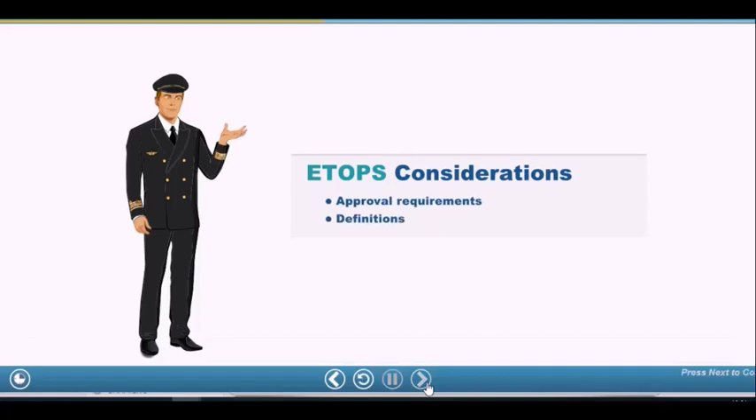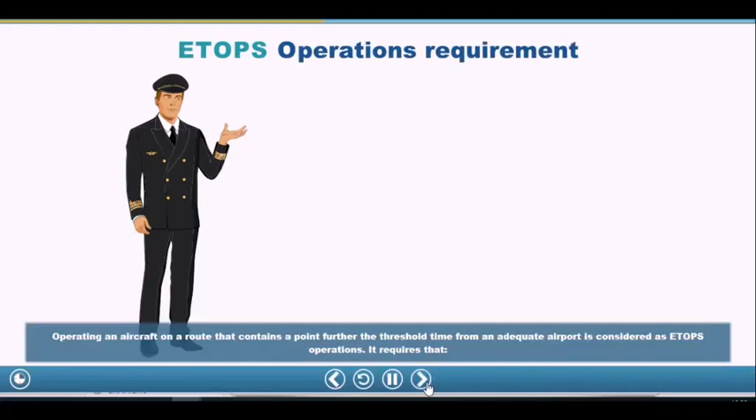Operating an aircraft on a route that contains a point further than the threshold time from an adequate airport is considered ETOPS operations. It requires that the aircraft is designed and certified for the intended ETOPS operations, that a training program has been established for flight crew and any personnel involved, including dispatchers and maintenance staff, that the operator has established operating procedures, and that the operator demonstrates its ability to support such operations with respect to its organization and experience, to be approved.

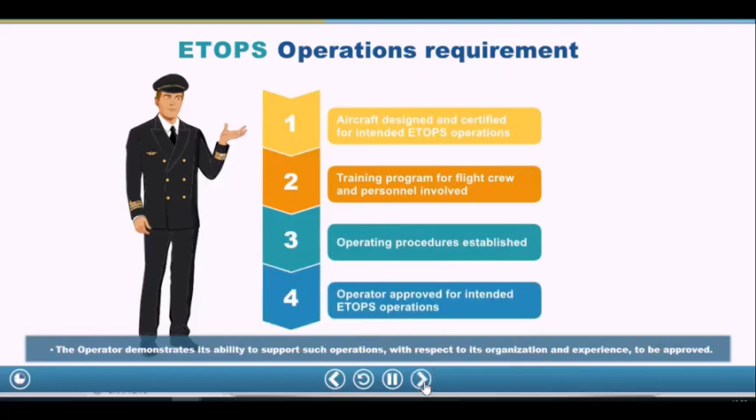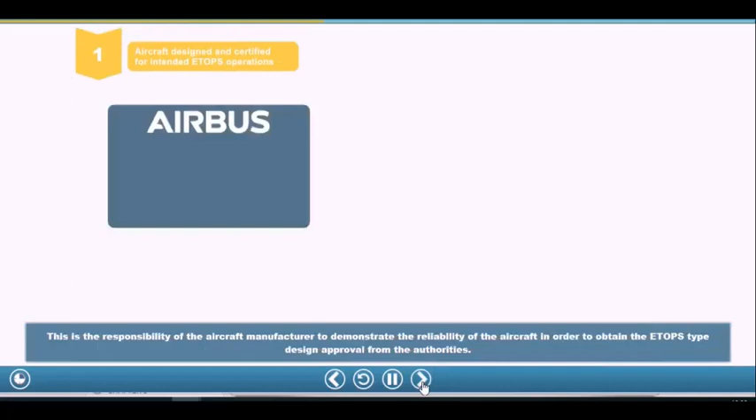As mentioned previously, the aircraft must have been designed and approved to meet the ETOPS requirements. This is the responsibility of the aircraft manufacturer, to demonstrate the reliability of the aircraft in order to obtain the ETOPS type design approval from the authorities.

The certification focuses on an airframe systems engine combination. Any deviation from the aircraft baseline to enable an ETOPS certification must be contained in the Configuration, Maintenance and Procedure Standards (CMP) document. The CMP is validated by the authorities. The process to be ETOPS certified is long, but the experience already gained on similar systems or engines helps to reduce this process.

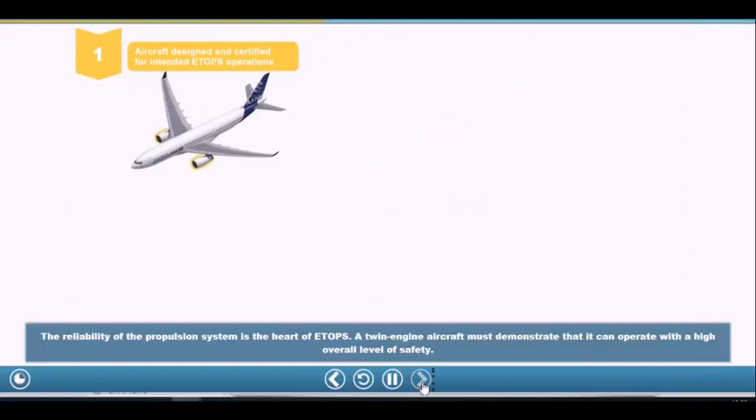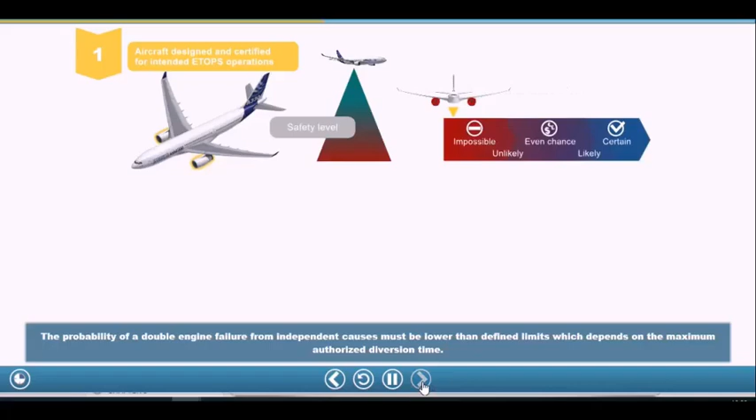The reliability of the propulsion system is the heart of ETOPS. A twin-engine aircraft must demonstrate that it can operate with a high overall level of safety. The probability of a double-engine failure from independent causes must be lower than defined limits, which depends on the maximum authorized diversion time. An in-flight shutdown, IFSD, rate objective is set accordingly.

The IFSD rates are monitored for a particular airframe engine combination. The monitoring takes into account the world's fleet on a 12-month moving average, in order to maintain, improve or downgrade the ETOPS approval.

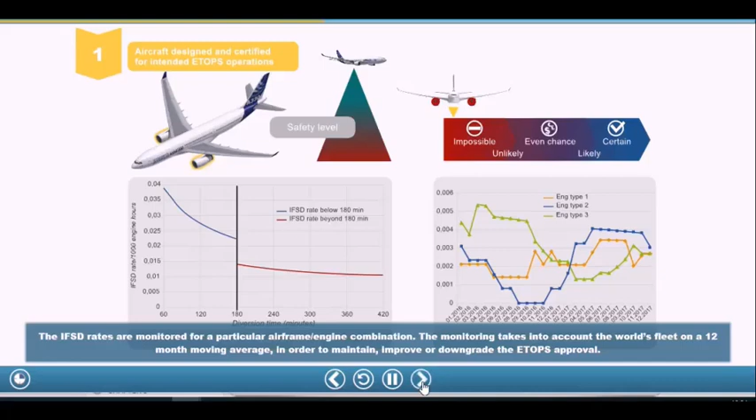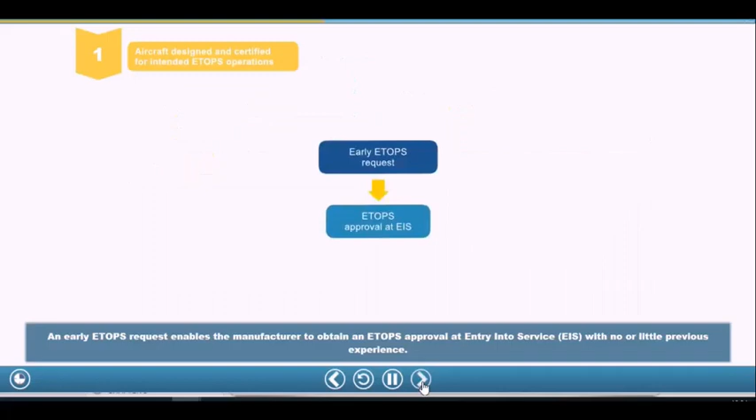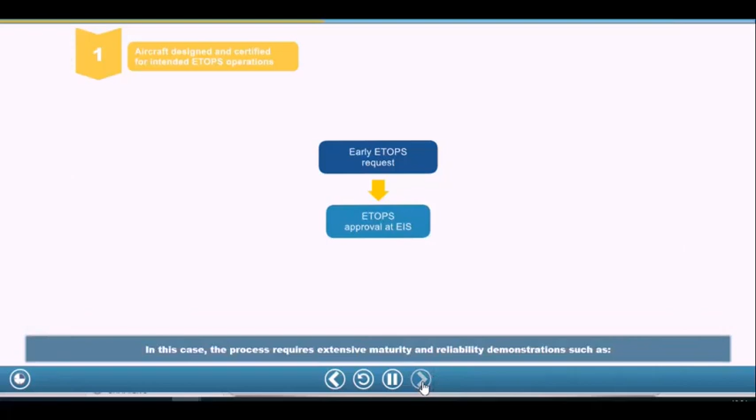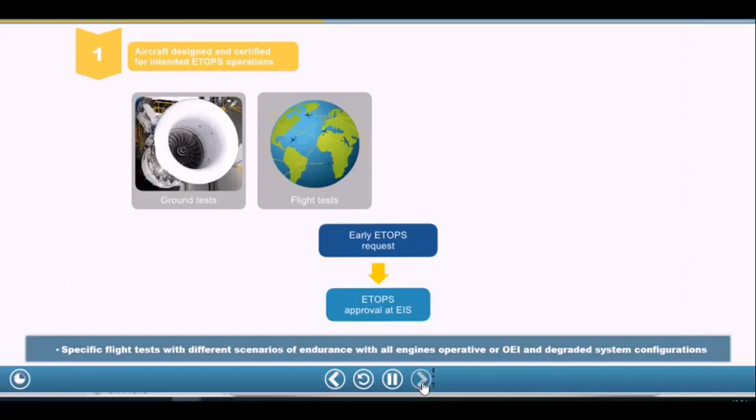An early ETOPS request enables the manufacturer to obtain an ETOPS approval at entry into service (EIS), with no or little previous experience. In this case, the process requires extensive maturity and reliability demonstrations, such as ground tests, specific flight tests, with different scenarios of endurance with all engines operative or OEI, and degraded system configurations. Analysis of the lessons learned from previous programs, and technology and experience transfers gained from previous programs, feed into the new aircraft design.

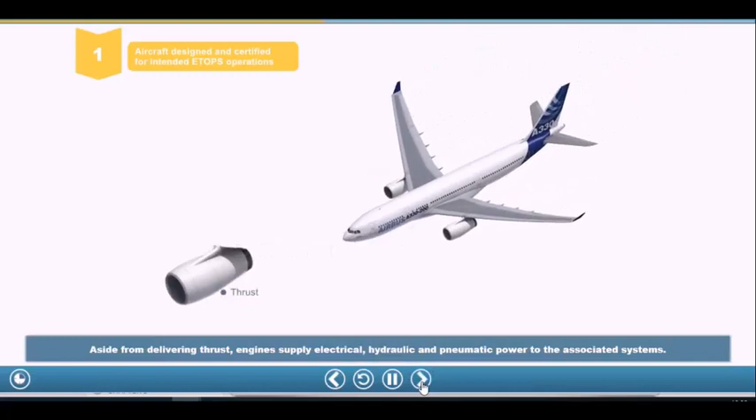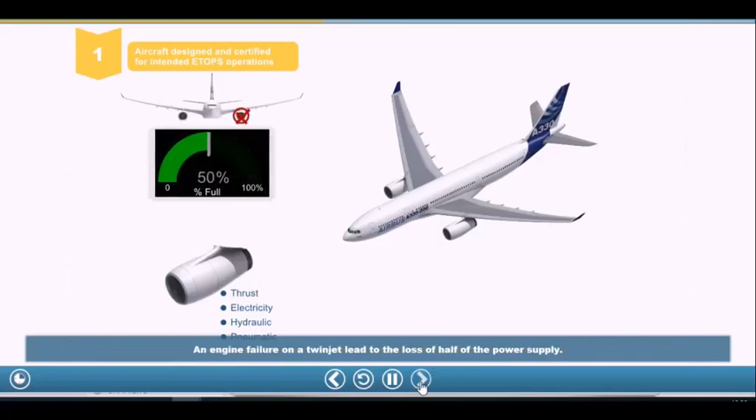Aside from delivering thrust, the engine supplies electrical, hydraulic and pneumatic power to the associated systems. An engine failure on a twinjet leads to the loss of half of the power supply. The aircraft design must integrate reliable and/or redundant systems to recover a good overall level of operational safety.

What do you see as the potential systems concerned by ETOPS requirements? All the following systems are concerned. Click on the systems to get more details about the design requirements.

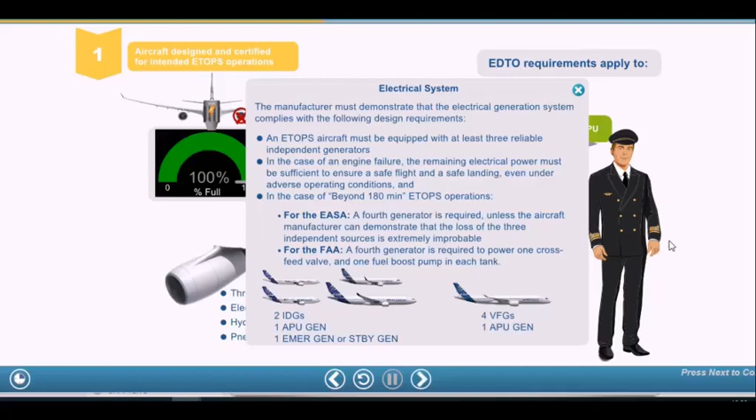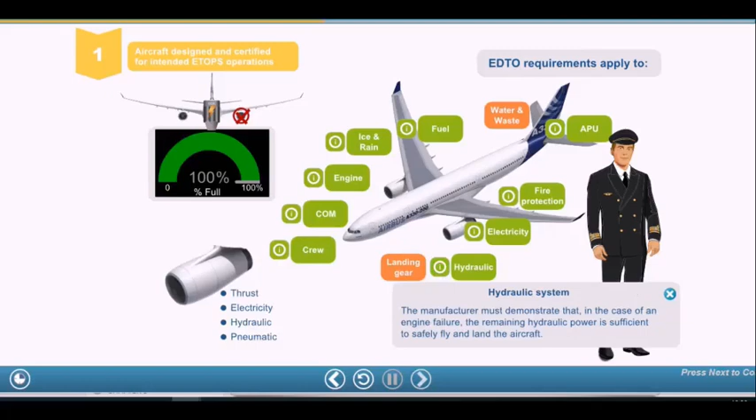The ETOPS approval for each aircraft is indicated in the Airplane Flight Manual, AFM, in the Configuration, Maintenance and Procedures document, CMP, and in the Operator's Fleet List, in the Operations Manual. The ETOPS restrictions also have to be implemented in the MEL, and an ETOPS marking may be applied on the nose wheel door under FAA or certain NAA requirements.

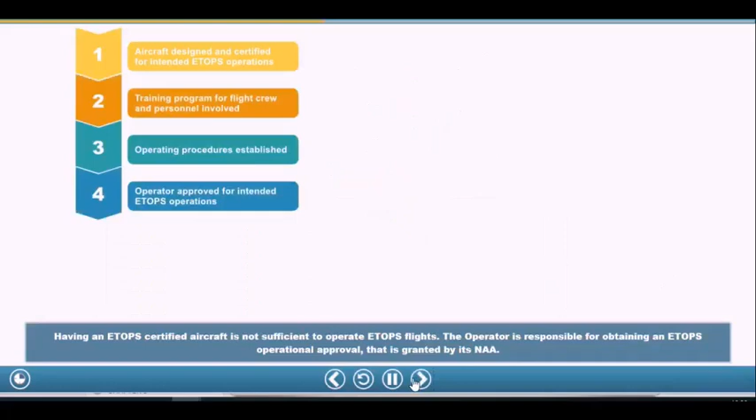Having an ETOPS certified aircraft is not sufficient to operate ETOPS flights. The operator is responsible for obtaining an ETOPS operational approval that is granted by its NAA. NAA's ETOPS criteria may differ from the EASA and FAA ones, and the operator must comply with them.

The implementation of ETOPS operations for an operator implies a new organization on flight crew, maintenance, dispatch practices, and flight operations, procedures and documentation. The operator must also nominate and train key personnel to acquire ETOPS experience.

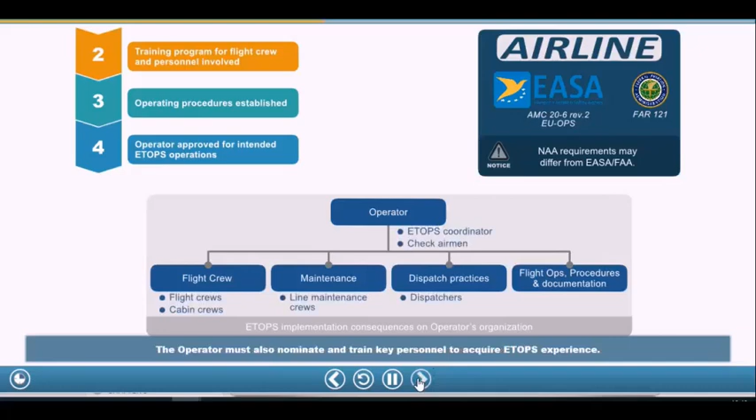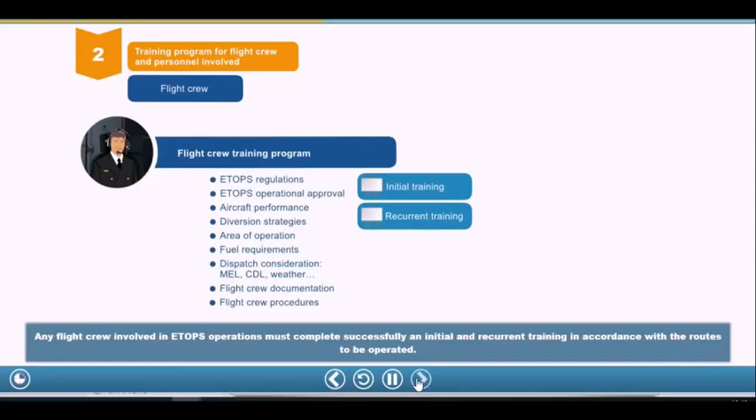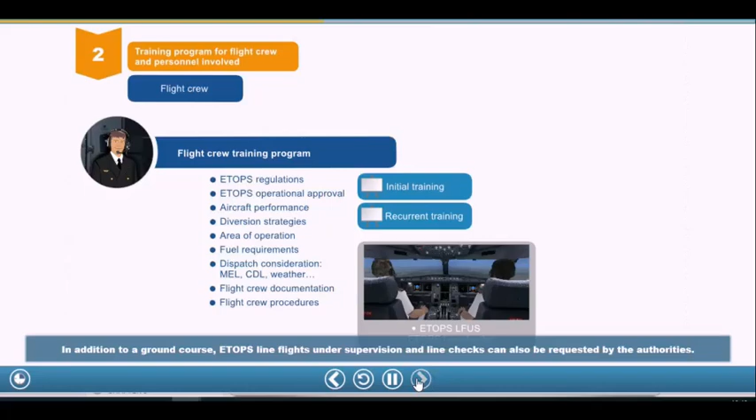The operator has to establish a training program dedicated to flight crews, to be approved by the NAA. Any flight crew involved in ETOPS operations must complete initial and recurrent training in accordance with the routes to be operated. In addition to a ground course, ETOPS line flights under supervision and line checks can also be requested by the authorities. In case of ETOPS approval where a mandatory recovery plan is required, cabin crew must follow a specific training.

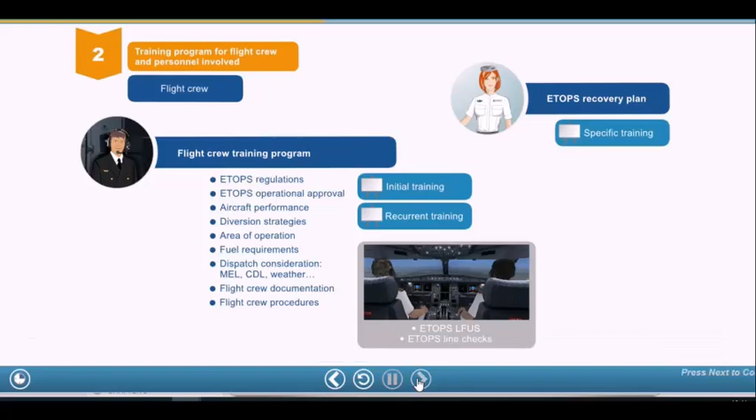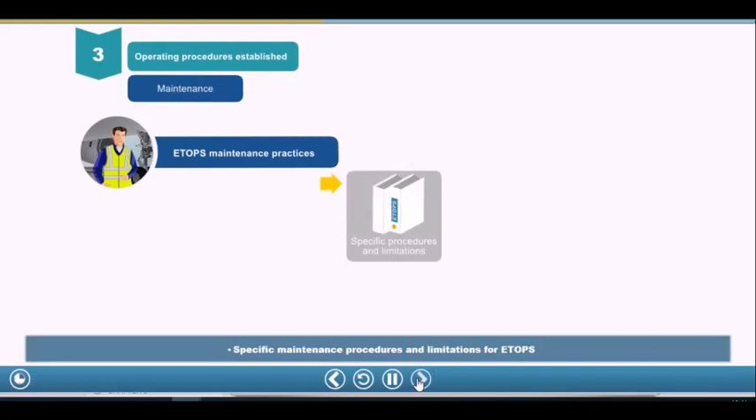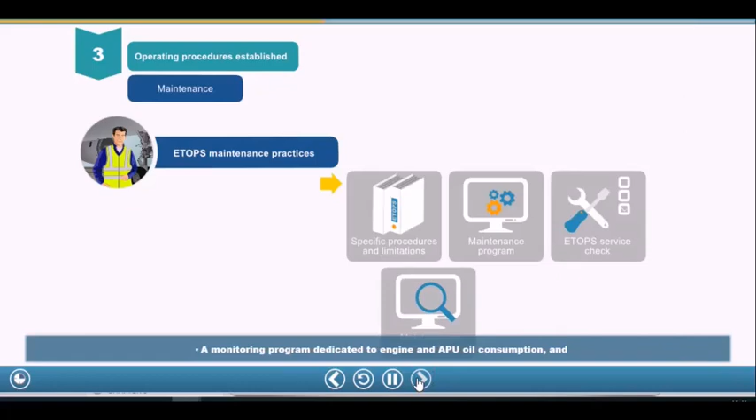Maintenance practices dedicated to ETOPS deal with specific maintenance procedures and limitations for ETOPS, a maintenance program to include ETOPS items, an ETOPS service check for an ETOPS flight dispatch, a monitoring program dedicated to engine and APU oil consumption, and the implementation of a reliability and occurrence reporting program prior to the approval, which must be continued during in-service operation. A maintenance training program dedicated to ETOPS specificities must also be established and approved.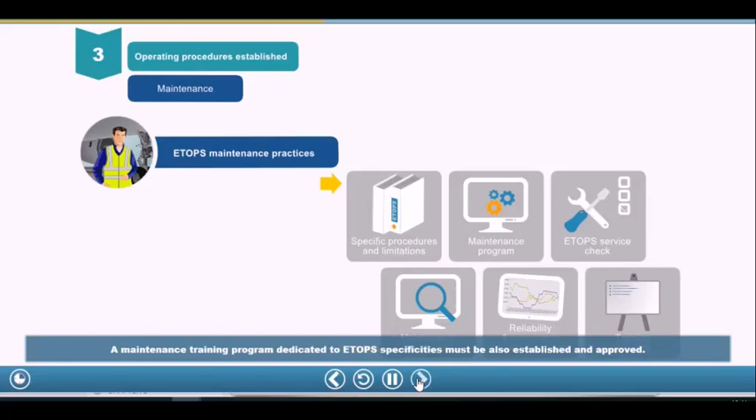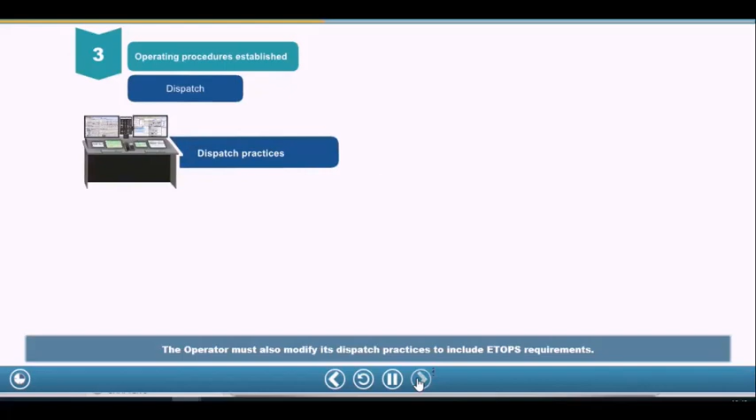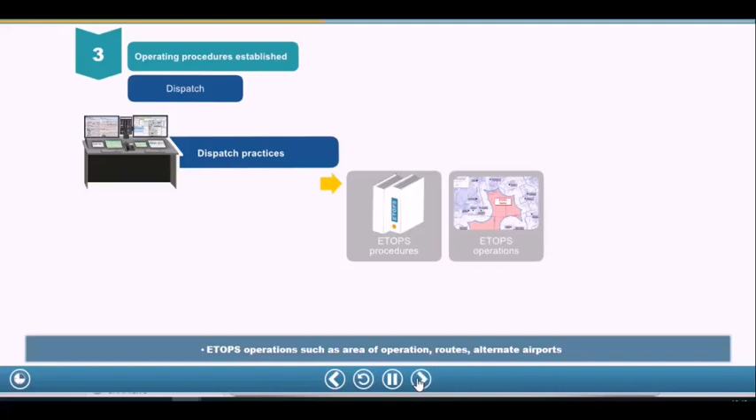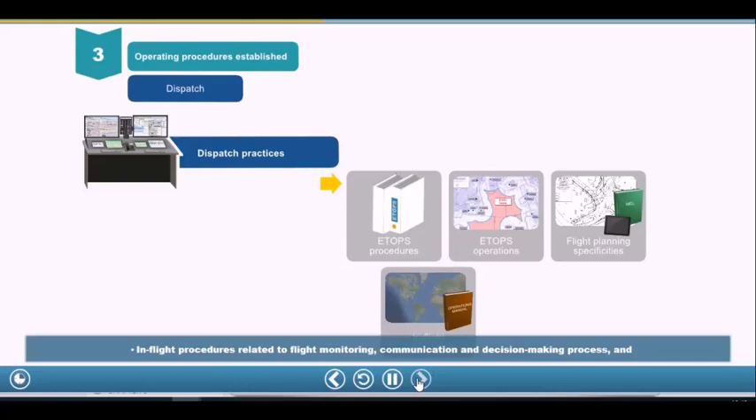The operator must also modify its dispatch practices to include ETOPS requirements. It deals with ETOPS procedures, ETOPS operations such as area of operation, routes, alternate airports, flight planning specificities like weather study and MEL consequences, in-flight procedures related to flight monitoring, communication and decision-making process, and recovery plans, if requested by the approval authority.

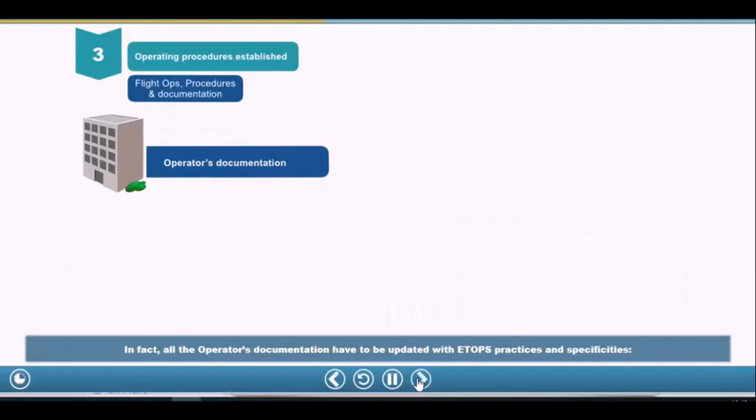In fact, all the operator's documentation have to be updated with ETOPS practices and specificities: the Aircraft Operations Manual (AOM), the Airplane Flight Manual (AFM), the FCOM, and the MEL.

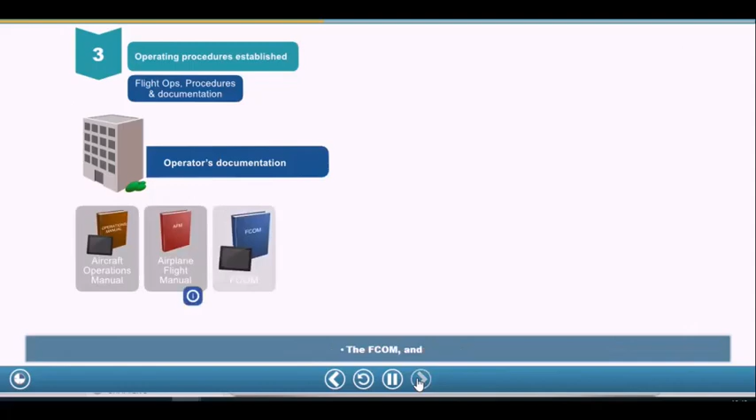Please find in your FCOM the dedicated part to ETOPS procedures.

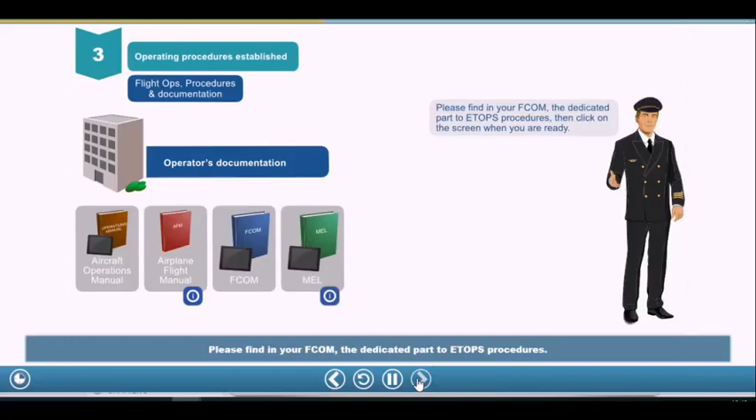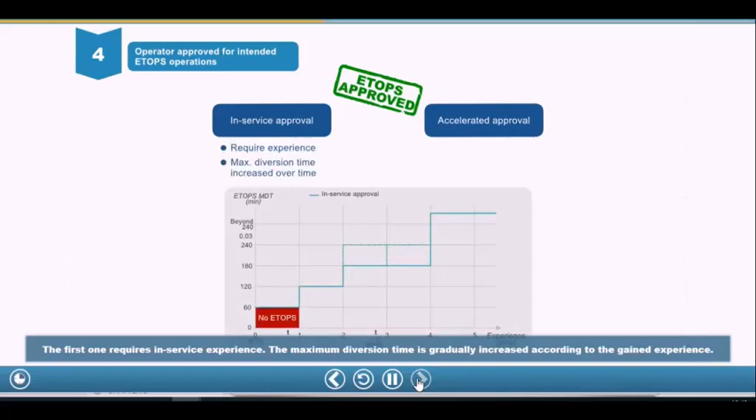According to the operator's experience, there are two methods to obtain an ETOPS approval: the in-service ETOPS approval, and the accelerated ETOPS approval. The first one requires in-service experience; the maximum diversion time is gradually increased according to the gained experience. The second one does not require any previous experience; it is based on the fact that reliable ETOPS processes are already in place with other aircraft or engines.

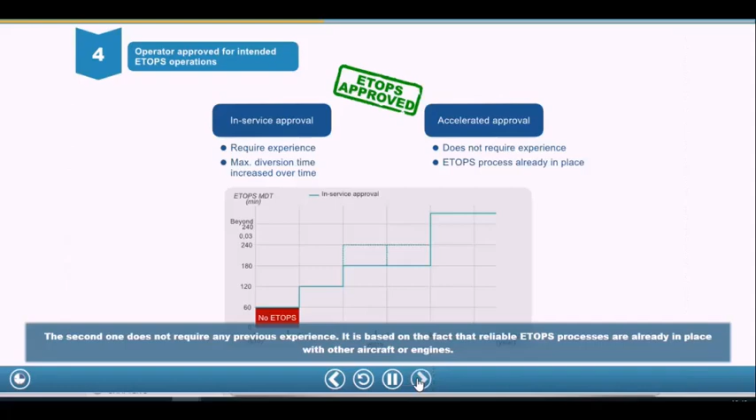In this case, the operator can obtain an ETOPS approval up to 180 minutes maximum diversion time at entry into service.